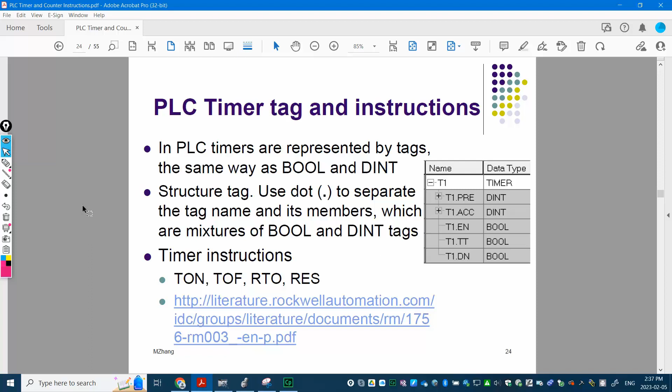First we can look at the timer on delay. This is TON, a new instruction. Within this instruction you have a box, and within the box there are 3 parameters. First, you need to specify the timer tag, so you use T1 to associate with this TON instruction. Then you set up the timing with a number, right now 5,000. The unit for the preset is milliseconds, so that's basically 5 seconds. The accumulator starts from 0 when it's running and increases until it reaches 5,000. That happens when the trigger is on.

Outside of the box, you can see two members also shown here: one is enable, the other is the done bit. There's another one not shown here called TT, timer timing. So those are the 5 members within the timer structure. In the program you can use the bit instructions examine on, examine off to check those 3 Boolean members. Whenever you use the EN bit, enable bit, remember this bit always follows the trigger. When the trigger is on, timing starts, the timer is enabled, so that bit is on. It's like a timer immediate output.

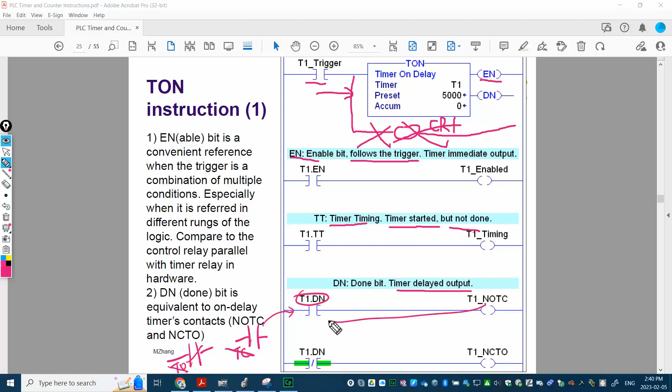So those are the two types of contact we learned in the physical timer relay. So with PLC, we just drop those letters. We directly use XIC (examine on) for the done bit. That will give you the normally open. You can see here, normally open, timed close, right? Because we drop the TC letter.

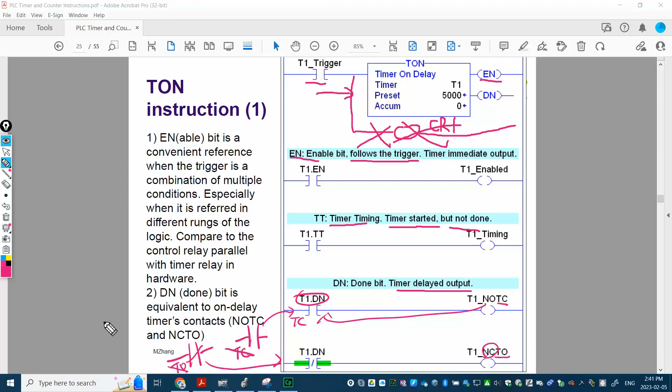So there's one more thing over here. You can see here, I have a comment about that. The enable bit is a convenient reference when the trigger is a combination of multiple conditions. What I mean is over here. So if, for example, what you're seeing over here, you only have one tag as the trigger. That's very simple, right?

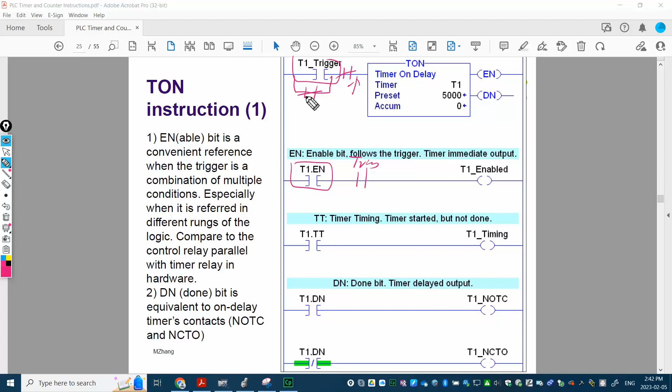That seems the enable bit is a little bit redundant. Whenever you need this enable bit, you can also use the trigger to do that, right? So that's a simple trigger. But if you have a combination of other conditions, for example, like over here, you may have something on here, and then maybe there's another condition on here, a combination of trigger. In that situation, this enable bit is more convenient, right? It's the result of those combinations. So that's something you can keep in mind.

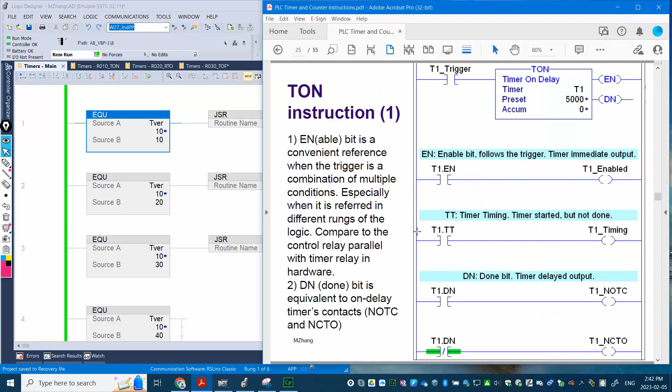All right. So that's the control bits and also the logic we can get from there. Then let's look at a demo of the on delay timer on here. Okay, so let me open the on delay. All right, so it's almost identical to the slide. So let's look at over here.

So we have a trigger start, T1, 5000, and over here I just put an empty rung. This is NOP, representing no operation. It's just a placeholder. I want you to observe the changes on those bits while the timer is running. And then we'll look at those here. So first, let's start the timer. Notice the accumulation is 0. Once I toggle the bit on the trigger, the accumulation will go up.

Timer starts timing. And when that happens, you will see the enable bit turn on immediately because that always follows the trigger. At the same time, you will see the TT bit, timer timing, turn on. Before reaching 5000, that's what you see: EN bit on and timer timing on. When the accumulation reaches 5000, you will see the done bit on. At the same time, the timer timing will be false because you already finished the timing, right?

So what I have is this parallel branch here. I want you to observe, look at there. The TT bit basically is the combination of timer enabled but not done. You will see whenever these two are true, together it's true, right? So let's look at on here. If I toggle the bit, start the timer, you can see enable is on, TT is on. These two are on, and then it reaches 5,000. Before reaching 5,000, that's off, right?

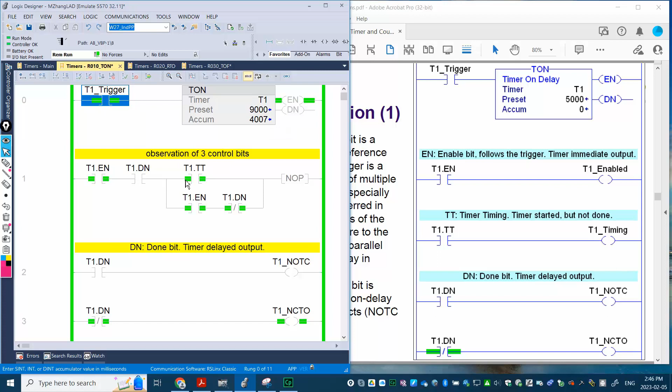So that'd be 9 seconds, right? I'm gonna trigger this one again, so you can see the changes with that. All right, so let's toggle. It's going up, right? And then enable is on, TT is on. Done bit is waiting for 9,000, 9 seconds, right?

So once you reach 9 seconds, the enable is still on because trigger is still on, but the timer finished the timing. Right? There's no TT bit anymore, right? So these are the three basic bits. You can use control on that, and then if I toggle that, that's gonna be 0 again.

So mostly with the timing function, we will use the done bit, right? I explained that. So done bit represents the timer delayed output. That depends on which instruction you use, right? If you use the XIC, that will give you the normally open time close function. So you can consider this instruction, right, as the normally open time close contact, right?

This one looks like the normally close time open contact, and then if you use that in the logic, you will get the same timing function like that. So like right now, timer is off, right? You can consider this T1 as the coil. When coil is de-energized, right, nothing is running, the normally open time close is open. Normally close, time open, right now is closed. That's what you see over here.

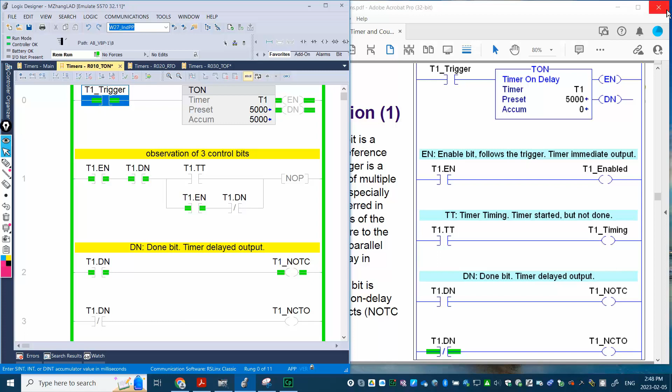Alright, so I'm gonna do the demo again. So clear to 0, then trigger on that. So once it reaches 5,000 accumulation, then you can see the change out there. Alright, so this is the basic operation with the TON. So let's look at more details on other parts.

Alright, so on this slide, I think I already did the demonstration between the TT bit of this two combination, right? So the second point on here, remember that timer also has two double integer members, right? Accumulate and preset. So of course you can use those members in the double integer instruction, right? So like over here, you can use that in compare, greater or equal, right? So for example, if you want to compare the accumulate with the 2500, remember 5000 is the preset, right? So whenever this accumulation is greater or equal to 2500, basically half of the 5000, you can output an indicator.

Because timer doesn't have the half done indicator, right? So you can create your own halfway done indicator on here, right? The other example you can see on here. So with the preset T1.PRE, you can change the value on here. So like over here, it has 20,000. You make the timer longer, right? Whenever you want to extend the timing period, currently it's 5,000, right?

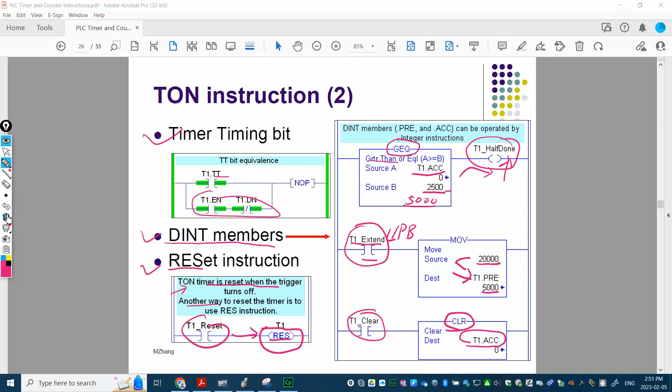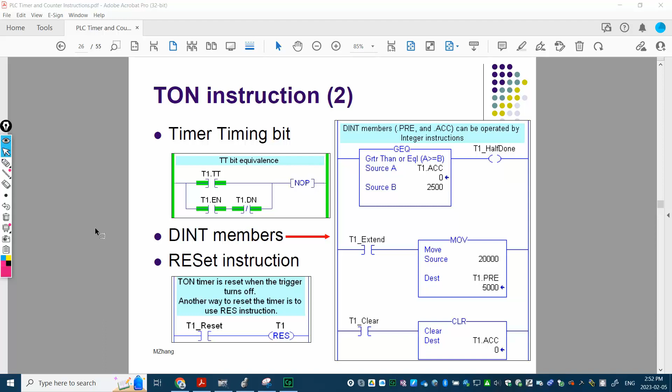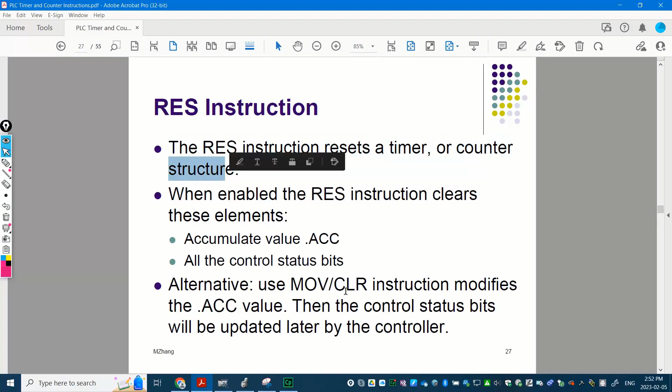So you may think, okay, it looks like this RES instruction doesn't mean a lot, but it has a very important function for the next instruction. That's what we talk about with the retentive timer on, right? So over here is just a brief description of the RES. You can read that, all right?

So let's move on to the RTO. RTO is a different type of timer. RTO basically is the same as TON, except, as you can see here, the R represents retentive. The accumulated value doesn't reset to 0 when the trigger is off. I can demonstrate that.

So remember, if it's TON, the timer is enabled by the trigger. Whenever the trigger becomes false, the timer clears to 0. But if you use RTO, retentive, the accumulation doesn't change. I made another comment here. Even when you have a power cycle, that means even if your PLC loses power, the PLC has memory, and the battery will keep that part of memory. Whenever you power back on, the accumulated value is still there, so it can keep going. That's a special part of the RTO.

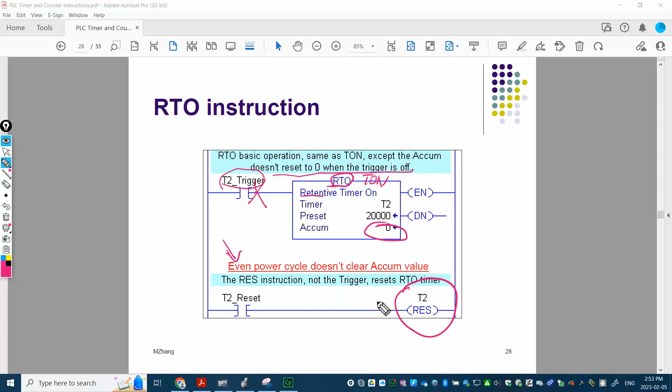So once you understand that, you know the RES is very important with the RTO instruction, because that's the only way you can clear the RTO timer to 0, right? So let's look at the demo again.

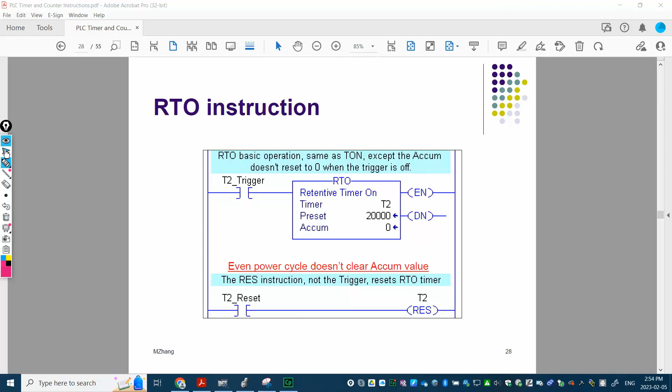Before I move on to the RTO, let's look at the TON again. Right now you can see the accumulated value is 5,000 because the trigger is true. If I toggle that, it automatically turns to 0. Even in the middle, if I trigger it again, it starts over. Then if I clear it before it reaches 2943 or so, you can see whenever the trigger becomes false, it clears to 0. This is what happens with TON.

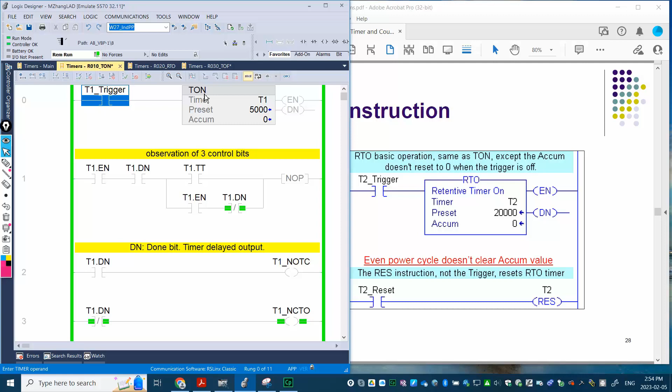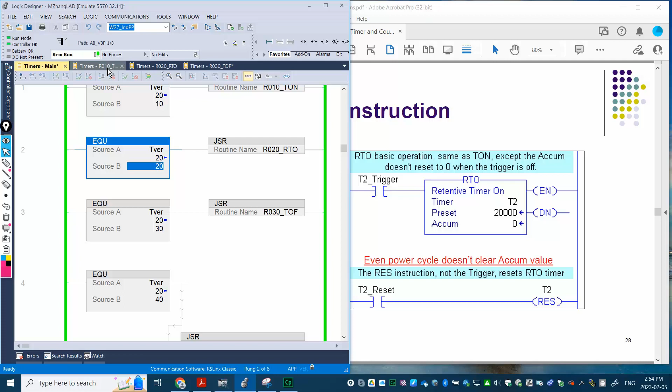Let me switch to the RTO, because I need to call a different subroutine. So now let's look at the RTO instruction. I have a different tag called T2 associated with it, and the preset is 20,000. If I trigger it, it starts to increase. Then if I toggle off, you can see the accumulation reached 3379, and it stays there. It doesn't clear to 0, but notice the trigger is already off.

So next time when you turn on the trigger, it will continue from the previous result and continue to increase. If you stop again, it just stops where it was: 11,823. Then when you turn it on again, it will continue from 11,000 and keep going.

So you can think of applications. For example, if you want to keep track of how long some equipment or component has been running whenever the PLC is powered on, you can use the RTO to record how long this equipment has been running. Maybe after 10 days it needs some maintenance. So that's the type of application for RTO. It's just a special type of timer on delay.

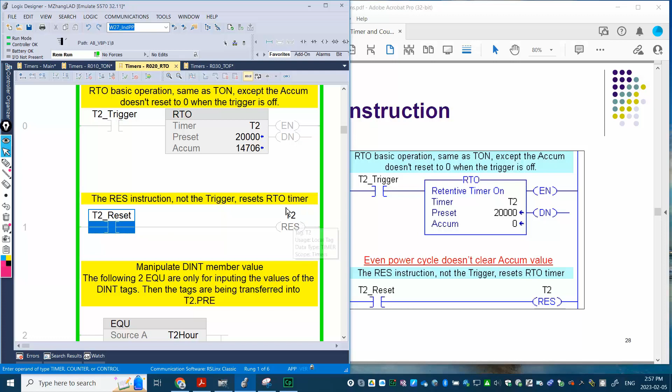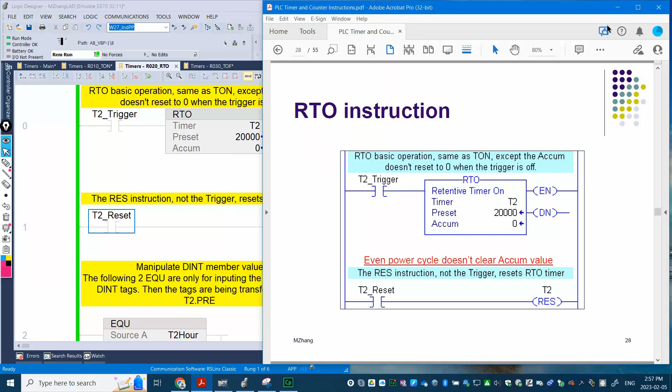If I toggle this, the RES will be executed, and that will reset T2. You will see the accumulated value change to 0. Toggle that, and it changes to 0. So this is the second type of timer, called RTO. Like I said, it's just a special type of on delay.

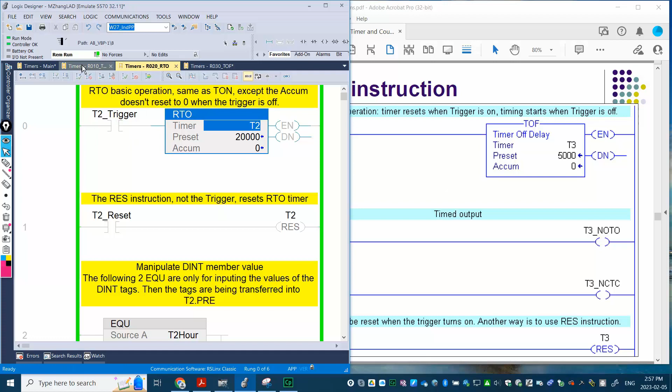All right, so let's look at the timer off delay. You know what? Let's just continue working with the program. Look at the demo first, then we'll look at the slide. So over here, because I want to run the TOF, I have to change this one to 30.

It's just for me to keep track of different subroutines. Now we are calling this TOF, so R30. So that's the timer off delay. Right, so if you remember the off delay, the timer will not start timing until the trigger becomes off. So you can see here right now the trigger is off, and that's just from the previous run, right? It just finished a long time ago.

So whenever I turn on the trigger, when this one becomes true, you will see the accumulation change to 0, right? Remember, it's off delay. What you see over here, this 7,000 is from the previous execution. It finished the timing, right? So when I trigger that to true, the timer off will be cleared. It will wait for the trigger to become off again, right?

Let me try to see here. When I trigger this, you can see the accumulation becomes 0. Then also you can see the enable bit. Remember, the enable bit always follows the trigger. When trigger is true, enable is true. But the timer timing is off. You can see the accumulation is not changing, so that means the timer is not timing. It's just reset to 0.

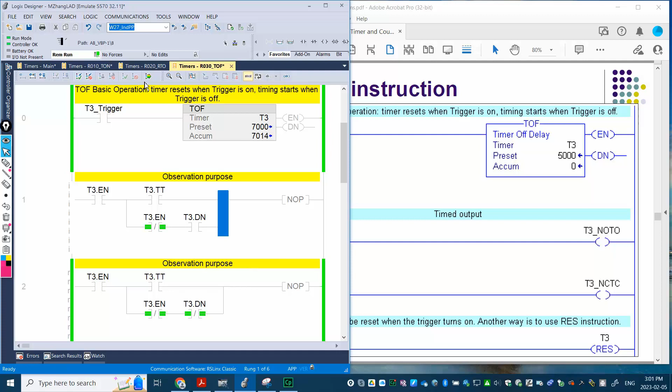Alright, so if I trigger this to off, you can see the accumulator starts, enable is off, timer timing is true, right? Oh, okay, this is a wrong setup. I should use the XIO (examine off), right? Because you can see the enable. I can change that to examine off, and then finalize, and that's supposed to be examine on, the opposite. I just copy-pasted from the on delay and didn't change that. So let's see if that's equivalent with the TT bit. At least now it's true.

So let me toggle this and clear that. So enable is on and timer timing is off, and this combination of two is also off. Then when I trigger that to off, you can see enable is false, and then TT is running, and these two together are true. Of course, you can use only the timer timing bit for the same purpose.

Then let's look at those two done bits again. Right now, this is the normally closed, timed closed. Because the trigger is off, the coil is de-energized, so that's closed. That's why you see the green bar highlighted here.

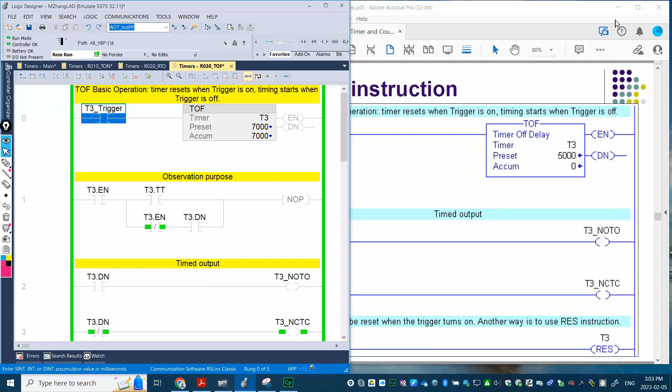Then when I start to energize the coil, when the coil is on, these two contacts switch right away because it's off delay. When the trigger is on, the coil is on, they switch right away. There's no delay. The delay happens when the trigger becomes off. When the trigger becomes off, timer timing starts, it will wait 7 seconds, and these two will flip. Like right now, they flip. Okay, so this is the operation of the timer instructions. Alright, let's look at the slides.

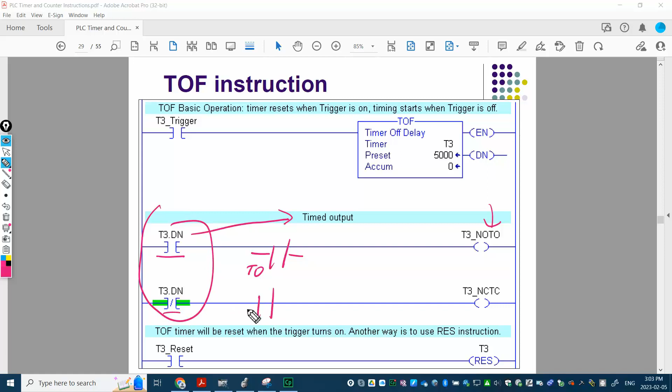Alright, so you just need to refresh your memory of the timer off delay. You will have an understanding of those two. You will see that the done bit represents done, D-O-N-E. So for the timer output, if you use examine on, that will be your normally open, timed open. Remember that's the symbol we use to represent the timer relay. And if you use the examine off instruction, you will have exactly the same timing function as normally closed, timed closed. Alright, okay, so I can finish this video right here.